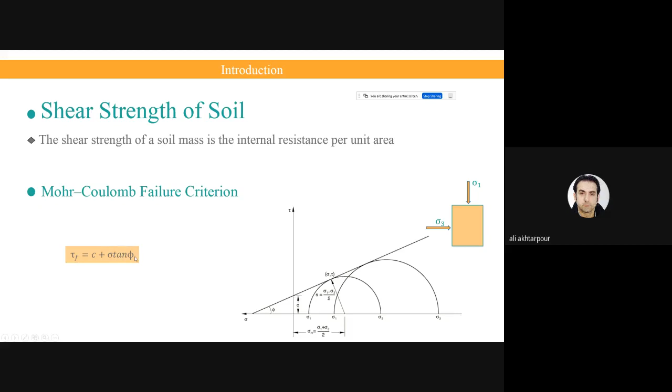Okay, it's just a review from soil mechanics, because you should know the basics of soil mechanics to understand the slope stability of the soil. We have two types of apparatus to measure these shear strength parameters. A simple type is the direct shear test. A direct shear test is a laboratory or field test used by geotechnical engineers to measure the shear strength properties of soils or rock materials.

The US and UK standards that define how the test should be performed are ASTM D3080 and AASHTO T236 respectively. The test is performed on 3 or 4 specimens from a relatively undisturbed soil sample. If you are going to evaluate the slope stability of a natural slope, you should take undisturbed specimens from the field.

But if you want to evaluate the slope stability of a man-made embankment, for example, an embankment dam or an embankment constructed for roadways and highways, or for the bridge, in this type of embankment you should compact the soil with the rollers. So you need to prepare the specimen in a manner that the density of the specimens will be equal to what you compact with the rollers.

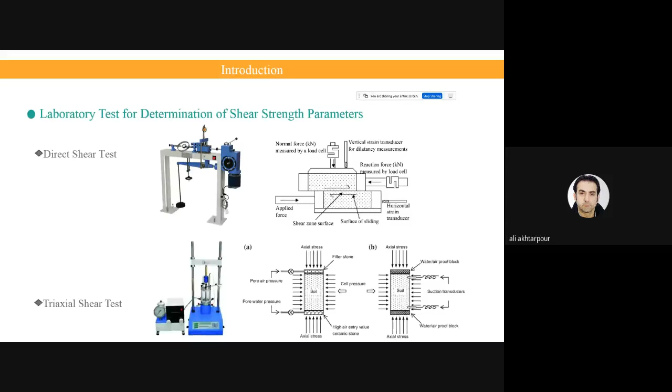For excavation in saturated clay soils, in short-term stability analysis, we should use only the undrained cohesion, and phi will be 0 for the short term. So it's very important to select the type of shear strength of the soil. Okay.

We have some programs and some methods to evaluate the stability of soils. Slope stability analysis is a static, analytical, or empirical method to evaluate the stability of earth and rock-fill dams, embankments, excavated slopes, and natural slopes in soil and rock.

Slope stability refers to the condition of inclined soil or rock slopes to withstand or undergo movement. The stability condition of slopes is a subject of study and research in soil mechanics, geotechnical engineering, and engineering geology. Analyses are generally aimed at understanding the cause of an occurred slope failure or the factors that can potentially trigger a slope movement resulting in a landslide.

The stability of a slope is essentially controlled by the ratio, please attention, the slope stability is controlled by the ratio between the available shear strength on a circle and the acting shear stress. Okay, the equilibrium between the available shear strength and acting shear stress can be expressed in terms of a safety factor. A slope can be globally stable

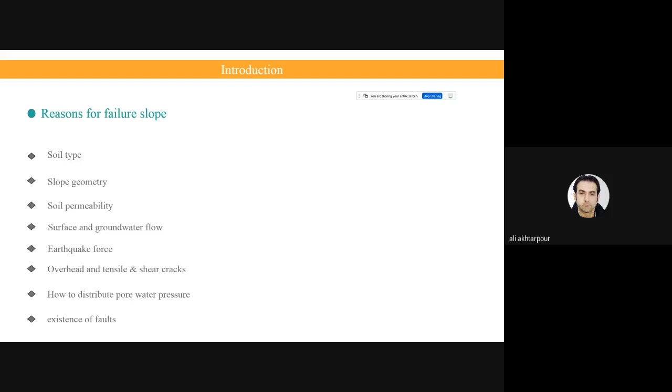To evaluate, we have some failure modes, the failure modes in limit equilibrium analysis. Let me give a brief explanation of limit equilibrium analysis. Most slope stability analysis computer programs are based on the limit equilibrium concept for 2 or 3-dimensional models. A stability analysis of 2-dimensional slope geometry using a simple analytical approach can provide important insights into the initial design and

We have different methods for evaluating the factor of safety. All methods are based on the comparison of forces, moments, or stresses resisting movement of the mass with those that can cause unstable motion. The output of the analysis is the factor of safety. Please pay attention: the output is the factor of safety for each assumed slip surface.

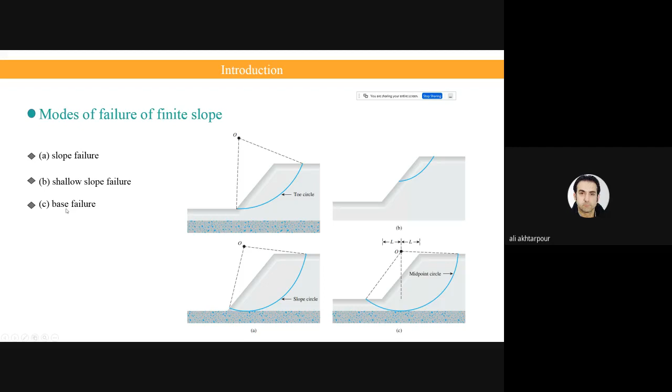Factor of safety, as I told you, is defined as the shear strength of the soil over the applied shear stress, or we can call it the mobilized average shear strength of the soil. Mobilized shear strength is equal to applied shear stress. Attention, applied shear stress is equal to mobilized shear strength in the soil mass. You can see here again the equation of Mohr-Coulomb.

The ordinary method of slices is more common for evaluating the factor of safety. For the slice method, we must first choose a shape for the sliding surface. Very usually we choose the circle type failure, but not in all conditions. In some conditions, maybe it differs from the circle. But in common slopes, the circular type is appropriate for evaluating the factor of safety.

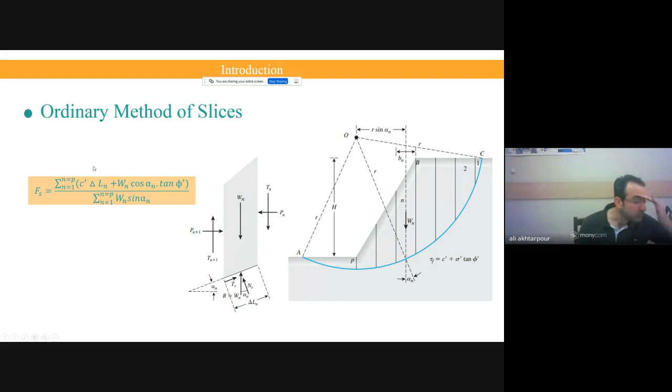Shear stress: if you divide T by the base slice area, you can have the shear stress on the base of a slice. The summation of the applied shear can be the total shear applied on this slice. But this method is not usually used because of the low accuracy of Fellenius.

Another assumption to evaluate this unknown force was suggested by Bishop's simplified method of slices. Because of the short time, I can't explain the theoretical basis of this equation, but the equation is somewhat different from Fellenius's equation. You can see here the effect of cohesion of the base slice, effect of friction, but here you can affect the influence of the pore water pressure. Here Un is the pore water pressure at the base of the slice.

Multiplied by this term. This term is a term which also contains the factor of safety. So you have an equation, the factor of safety is here, and also the factor of safety is contained in M alpha. So the software needs to have a trial and error procedure. It's very difficult to calculate by hand because the failure plane must be divided into many slices. For each slice, you should calculate the summation and do the trial and error procedure to finally calculate the factor of safety for that proposed sliding surface.

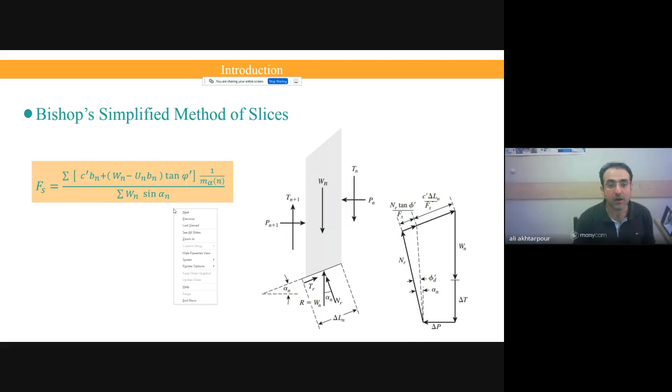But we don't know the exact location of the sliding surface. So as I explained, we need to have a large number of sliding surfaces and calculate this procedure. After that, the minimum factor of safety is the predominant factor of safety, and the related shear failure plane is the dominant mechanism for the sliding. So it's very difficult to calculate, hence we are going to introduce a software called GeoStudio for solving the problems.

As I told you, we are going to work with the 2018 release, and I have a version of this software, and I can send all the participants the full license of GeoStudio by Telegram. GeoStudio contains about 7 modules: SLOPE/W, SEEP/W, SIGMA/W, QUAKE/W, TEMP/W.

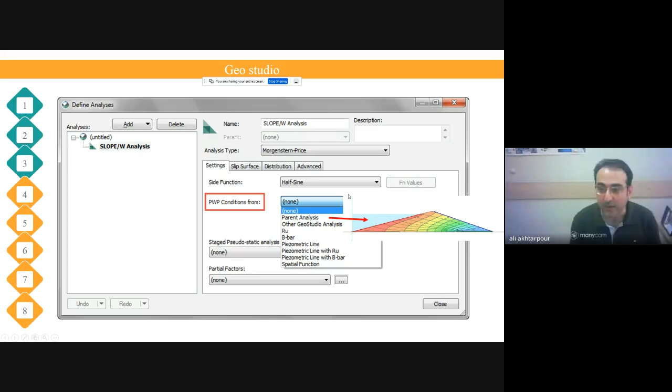If you use another GeoStudio program, for example SEEP/W, to perform a seepage analysis, like a seepage analysis in an embankment dam, then you can use the parent analysis type, introduce that file, and the program will extract the pore water pressure from the calculated seepage analysis into SLOPE/W. It's somewhat complex for you, so you need to work with a simpler PWP condition type.

Another type is Ru. Ru is defined as the pore pressure over gamma multiplied by H. Gamma H is the surcharge, and Ru is a ratio multiplied by gamma H for every point, and the program will calculate the pore water pressure. Another type is B-bar. It's really complex, it's not suitable for you.

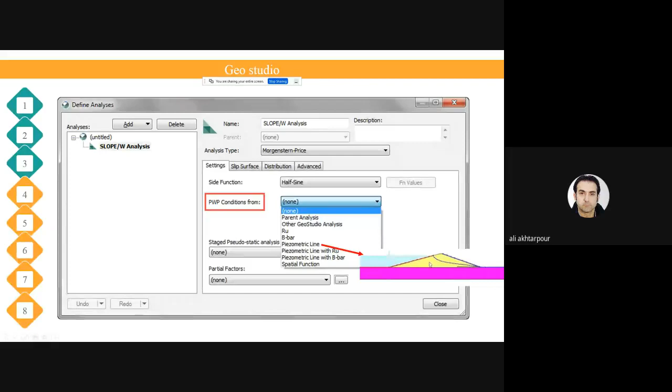The more suitable type for introducing the PWP condition for you is the piezometric line. When you evaluate slope stability, for example for this type of dam, you know the phreatic line is like this in the body of the dam. So you can draw the phreatic line, and the program will calculate the pore pressure from it, as I explain later.

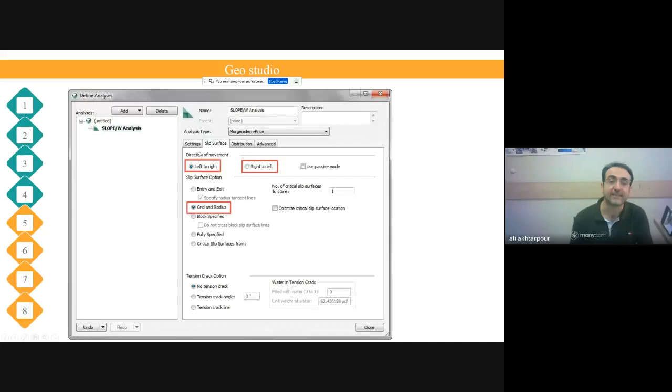Okay, slip surface type. After you choose the PWP condition, you must choose the slip surface. After the settings tab, you can see slip surface. You click on it, and you see two types: left to right and right to left. If the sliding surface begins from the left and continues to the right, you have to choose left to right.

But if the geometry is drawn on the right hand side, the slope will begin from the right into the left, so you must choose right to left. Okay, I just explained the more common expressions here. Some of them are not suitable for you; just the common and usually used parameters here.

Also, you can introduce the region and limitation of the slip surface by two types you need to know; the others are not important for you. One type is entry and exit. I will show you in some examples. You select a line limiting the start of the circle and a limitation for the end of the circular surface, so the program will go from each point in the upper part to each point of the lower part of the slope.

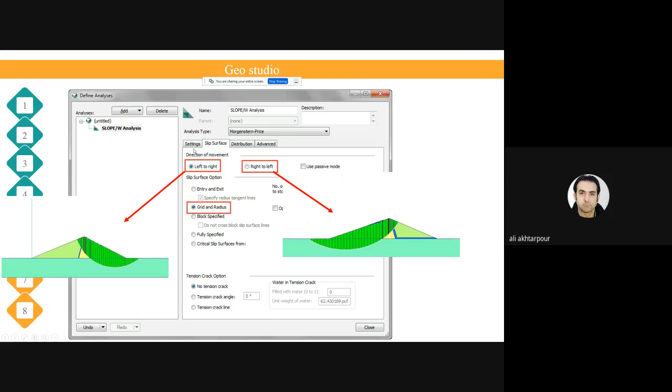Okay, here you can see left to right. It's an embankment dam: here for downstream, and for upstream of the dam you can see the right to left direction of movement. Here you can see the entry and exit: the entry region and the exit, and you can choose the number of divisions, and the program will draw the circle from each point of the entry to each point of the exit. This is just one of the circles.

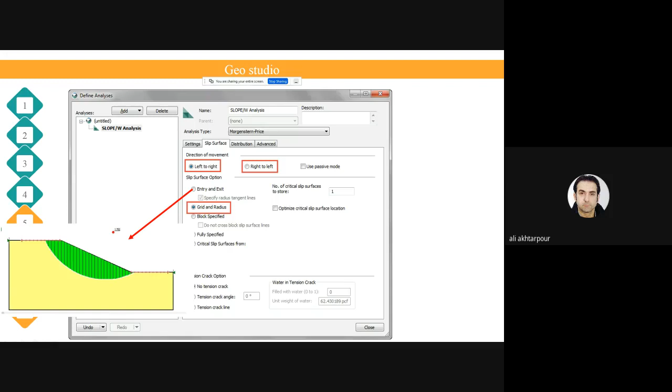We have many circles depending on the whole number of divisions, the number of points you choose for the entry and exit, from each point to each point. Maybe more than hundreds of circles can be calculated by the program in a short time because of the high performance of today's computers.

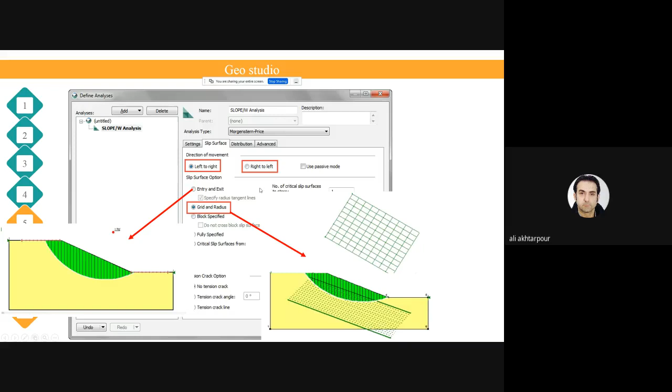Grid and radius is like this. Here you define the grid for the centers of circles, tangential to these lines. Circles are drawn from each grid point tangential to one of the lines, so we have a large number of circles in the defined regions. So you need to define the slip surface area; it's very important. You should choose the area that covers all possible failure surfaces.

Okay, in the second part we explain the units. Please pay attention: View, Units, and here you can choose the units, for example the unit for weight, for force, for time.

Usually in Iran we use metric units. Maybe in Iraq it is similar. Metric units are more common in our calculations: the kilonewton for the force, meters for the distance, the kilogram for the mass, and the second for the time.

In the second slide, you can see the model geometry. Here you can see a simple drawing, a simple geometry. First, we have to select the points, and we can select the points by two methods: select on the page, or input the coordinates here.

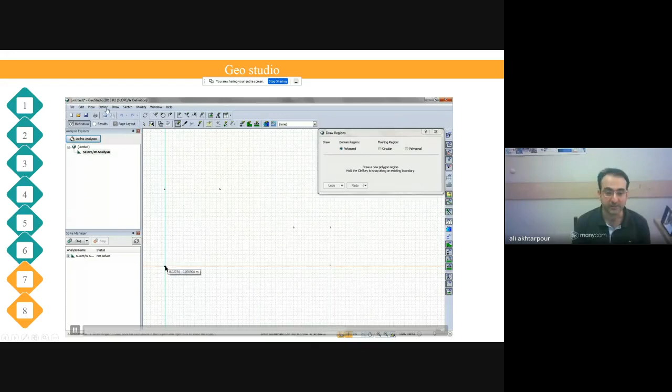I define 5 points. After that, we must select the regions. Please see again. Here you can define the points by clicking on the page, or define the points here by inputting the coordinates. After that, you must select from the Draw menu, Draw Regions.

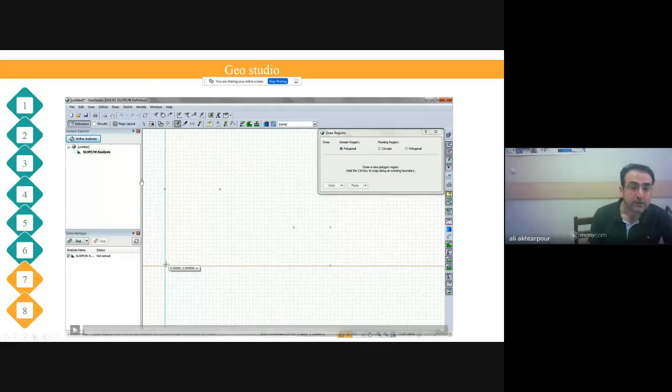Dr. Ali, excuse me. I think you have a problem in your presentation because there is no program page here, just the presentation, just the notes. I think you have to share your entire screen, to be able to share the program and the PPT at the same time. I have prepared a short video from GeoStudio. Now we are seeing just the presentation, doctor. Can you see the environment of the software? I see it now. Okay. It's a short video prepared before. Thank you. I will continue.

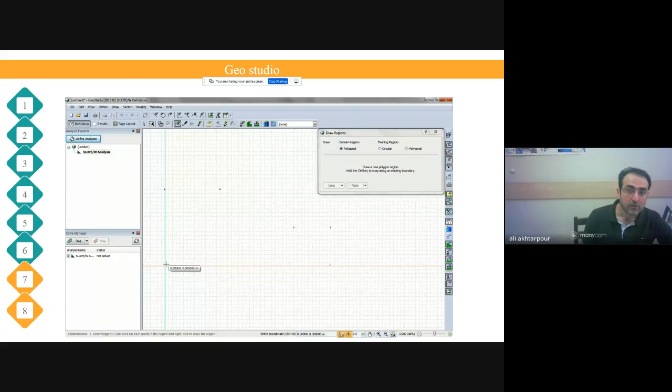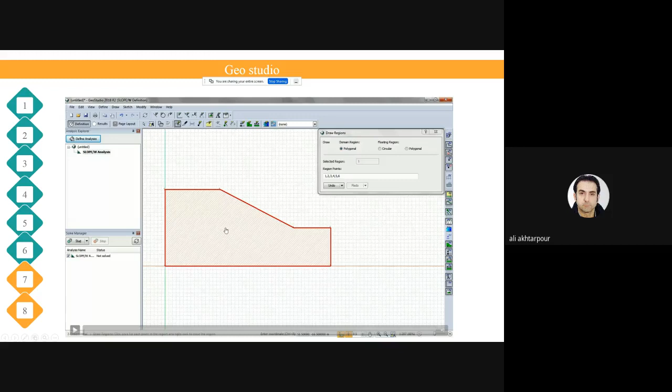After that, you must choose Define here and Draw Regions, and connect the points. After the final connection, a polygon will be formed and a hatch can be seen in the polygon. Here you can see the number of points: from 1 to 2 to 3 to 4 to 5 to 6, and a closed polygon is formed.

After that, we must introduce the material properties. For example, we have a soil with gamma equal to 18, cohesion equal to 10, phi equal to 30, and for defining the water pressure, we use the Ru method, the pore pressure ratio method, equal to 0.27. Here you can see the Define Materials menu.

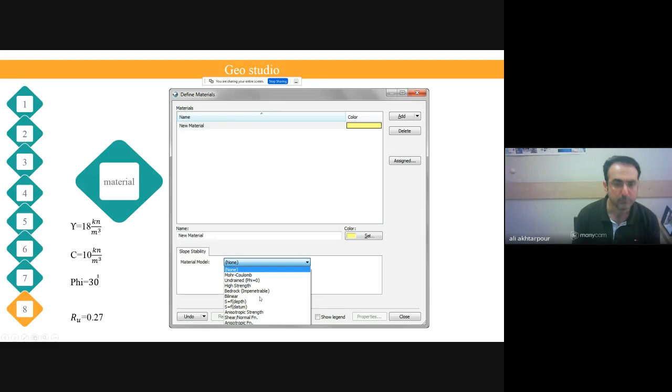Here you click on Add. I can't click here because it's a video, but you can see the video in the next slide. Add, select a name for the material, and click on the tab here. You can see some different shear strength model types for the soil. The more common type is Mohr-Coulomb, so you use the Mohr-Coulomb failure criterion. Here you define the failure criterion for that material.

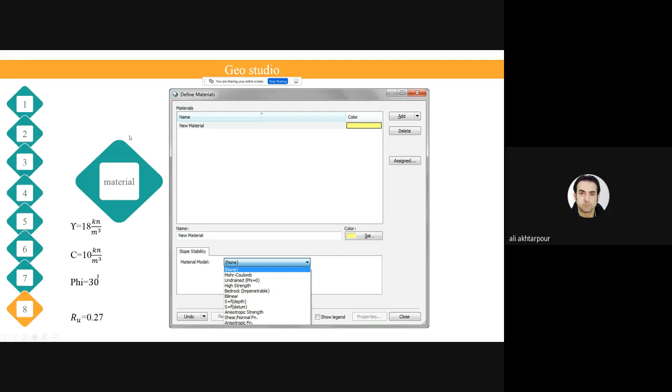If you have many materials, for example 5 materials, you should press Add and define 5 materials here. Each material must be a different region in the geometry input. Next, you can see a larger, clearer picture. Here you can see a video.

Please pay attention. Define Materials, add new material, give it a name, for example, soil 1, material model Mohr-Coulomb. Then you can see unit weight 18, cohesion 10, and phi equal to 30. This tab is suction. Suction is not used, and the advanced tab is not needed for you.

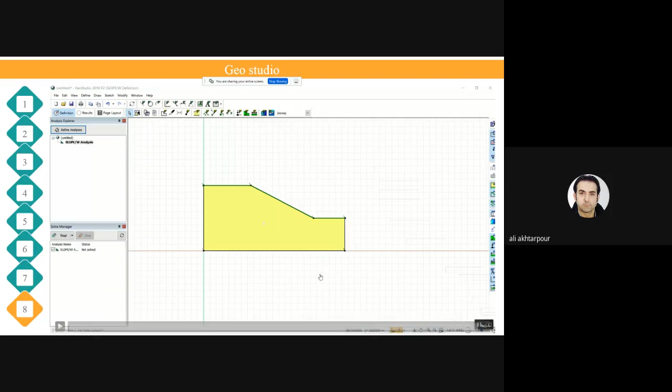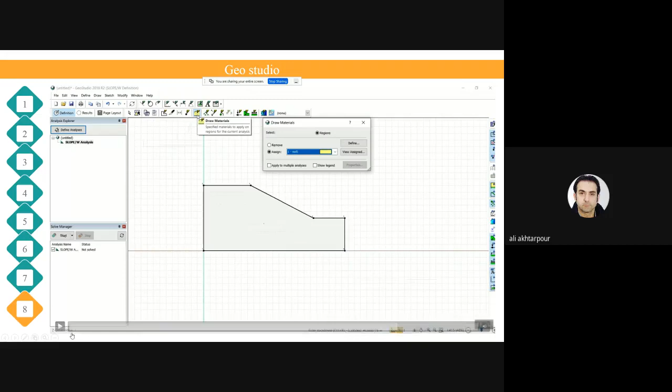After that, you Draw Materials. Here you can see the materials. Choose Assign and click on the region. I repeat it for better understanding. Draw Materials from this icon, select soil 1, then Assign and click on this region.

Soil 1 is considered for region number 1. In this simple model we just have one region, number 1. You may have different regions with different soil types and soil parameters. In the next slide, you can define the pore pressure ratio here.

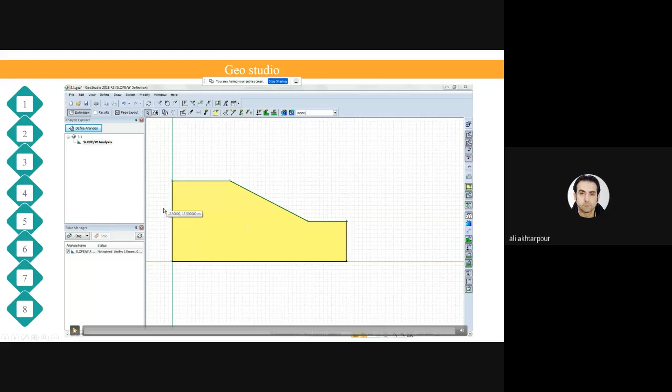Here, define pore water pressure tab. After that, choose soil 1, and the RU coefficient is defined here. As I told you, it is the coefficient of pore water pressure to the gamma multiplied by H in the RU method.

RU method, please attention. The RU method is only defined for fine soils where a consolidation phenomenon can occur, when undrained behavior can occur, and when development in the pore pressure in the soil can occur. Just for saturated fine soils such as clays and silts. It can be used in embankment dams: just for the clay core, we use the RU method to define the pore pressure conditions.

Okay, please see again. Define pore water pressure. Select soil 1, input the RU coefficient, and then close. Next one,

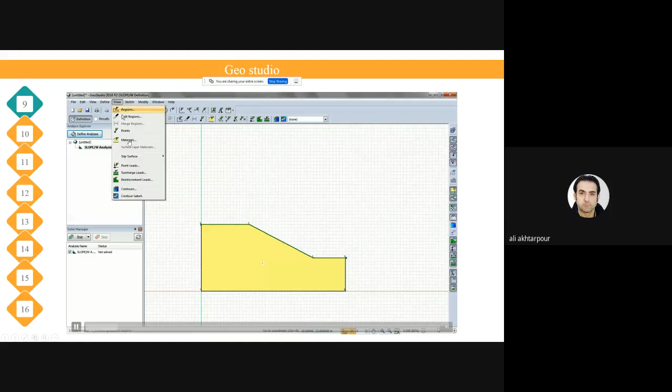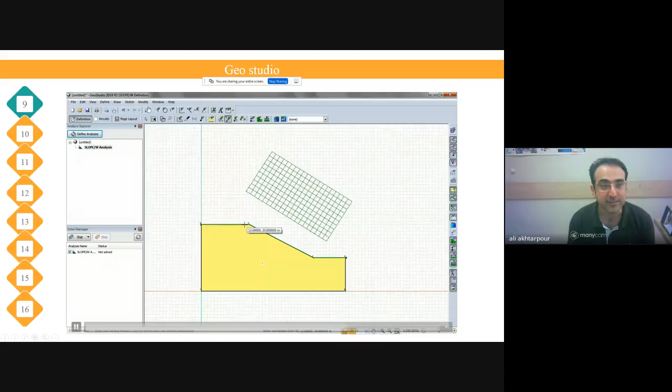draw a slip surface. As I introduced to you before, in this model we use the slip surface entry and exit type. After that, you can set the grid number of increments, for example, 20, and in the y direction, 10. Divide into 20 by 10 centers for circles. After that, draw the tangential lines, okay? And the radius increments, 10, divided into 10 lines.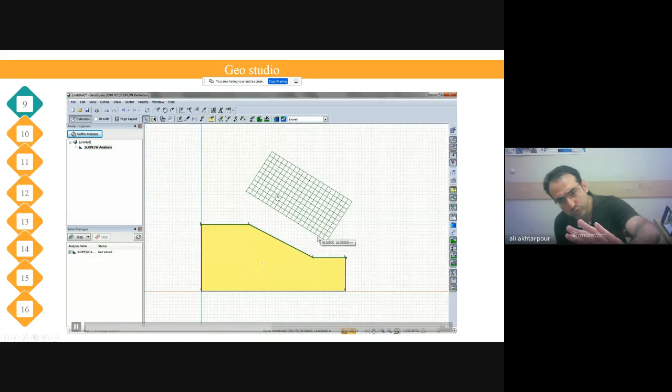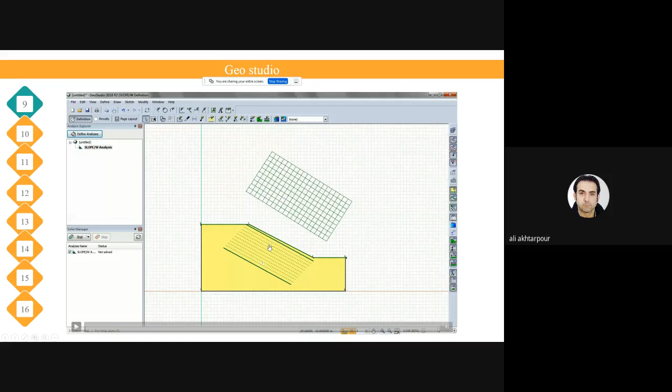Again, please see. Draw a slip surface, grid, define the grid region here, like this. Number of increments, 20, for example, by 10. You should use a large number, for example, 10, 20. This type. After that, slip surface radius. Here you should define this area and the number of radius increments, 10. The program will draw circles from each of the grid points to each of the tangential lines.

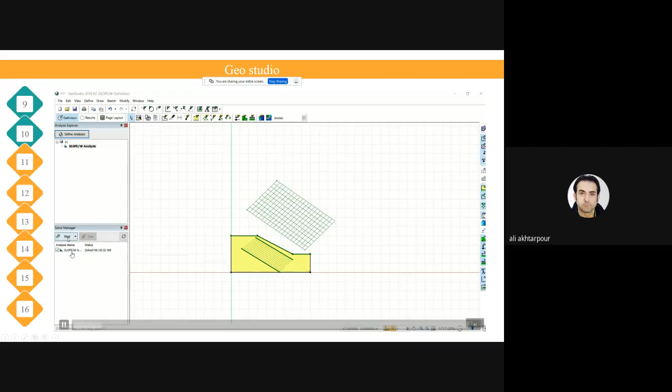In the next step, analysis. So the definition is finished for a simple geometry. Now, in the next step, we should click on start from here. Okay, start here, start. You can see here, start. The program in a very short time calculates the factor of safety for hundreds of circles.

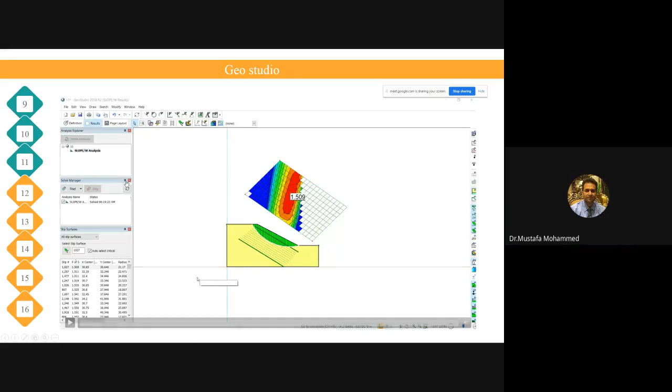Yes, you are presenting now, doctor. Go ahead. Could you see? Yes, it's clear. But don't forget, you have to present your entire screen. Yes. Okay. We see it. Thank you.

Here you can see the result, as I explained before, for each circle and also for all circles simultaneously. Okay, all circles. And the red circles are the critical ones. The most critical is shown previously. You can change the font size here and see the factor of safety between two numbers for each color. Each color is related to some factor of safety, okay?

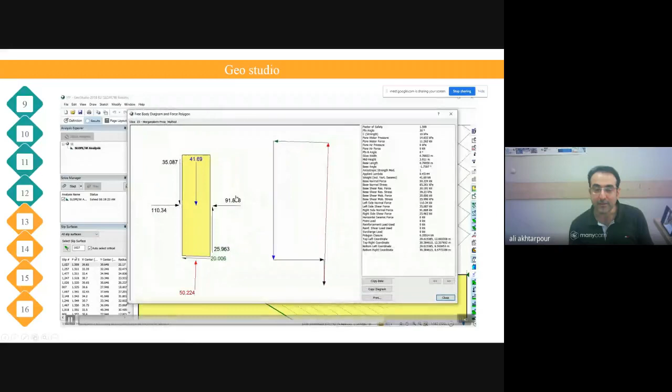Next, in the next slide, we can just explain briefly the slice calculation, okay? You can see here from this icon, the slice, okay? Or here, choose a slice, and you can choose any of these slices and see the free body diagram. By choosing any slice, you can see the free body diagram, the interslice force, also the weight, and also the reaction force, as I explained in the basics of the methods. So here you can see all the slice forces.

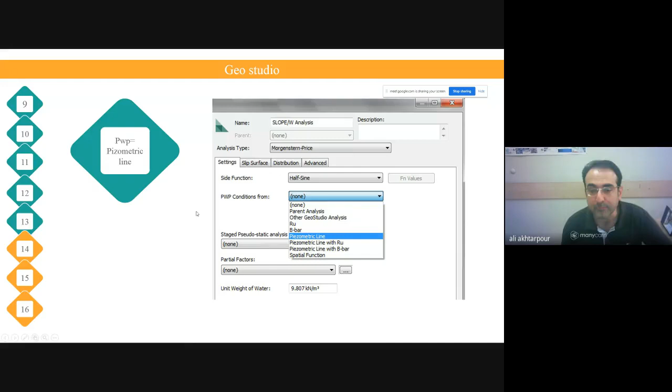Next, introducing the pore water pressure by piezometric line is usually more common for you. As I explained before, in the first window, you have to choose piezometric line instead of RU. After choosing the piezometric line, follow the modeling and the material properties like the former example, and you reach the stage where you should define the pore water. Again, we define the pore water and piezometric line.

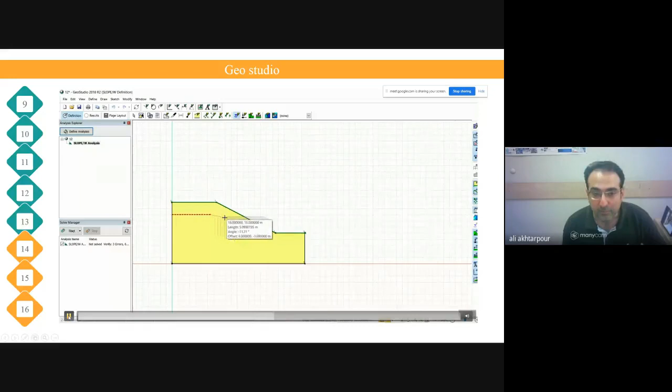You can here draw the phreatic line into the soil. Okay? Let's see again. Here, draw pore water pressure, select the type, apply piezometric line, draw the piezometric line here. Okay, done. And the program will apply the pore pressure for each point below the phreatic line.

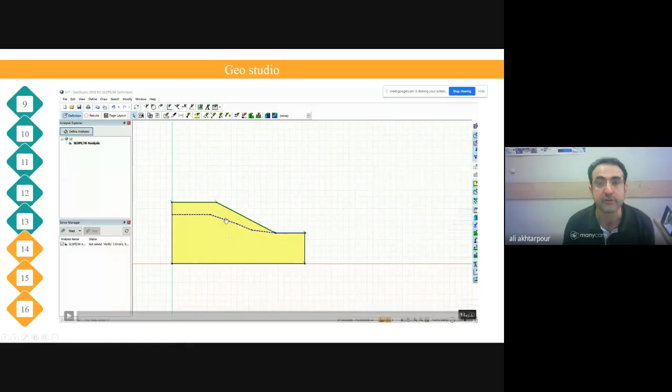Attention, please. For the upper part of the phreatic line, the pore pressure can be considered as 0 or negative. It's based on the unsaturated soil theory, which is not suitable for you. You assume that it's 0, that above the phreatic line there is no pore pressure. But in reality, the pore pressure is negative. For the points below the phreatic line, the pore pressure is calculated from the distance of each point to the phreatic line, as you can see in the next slide, the calculation analysis.

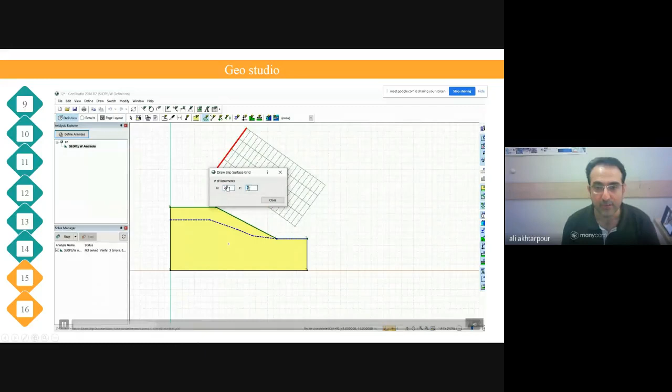Again, we choose start. Here, grid, define the grid regions, like the former example, 20, 10. After that, draw a slip surface, radius, define the limitation for tangential, number of radius increments 10, divide into 10 lines, then start calculating. As we can see, very rapid calculation, and finally increase the font size, and you can see here the factor of safety is less.

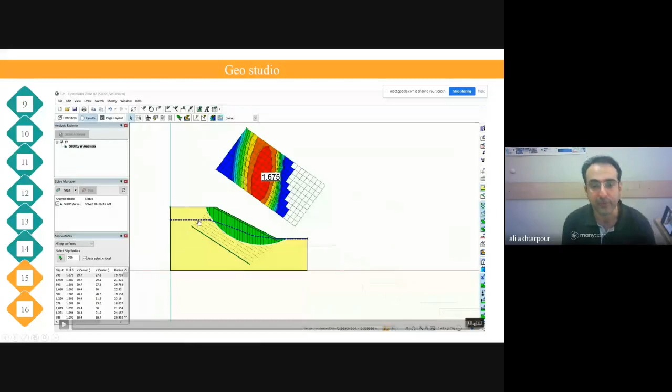It can be compared with the previous model. In the previous model, we used RU, but here, instead of the RU pore pressure ratio, we define a phreatic surface, and the computer calculates the factor of safety based on the defined phreatic surface line.

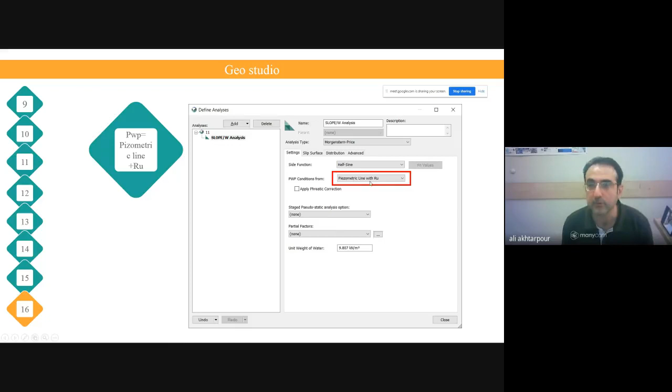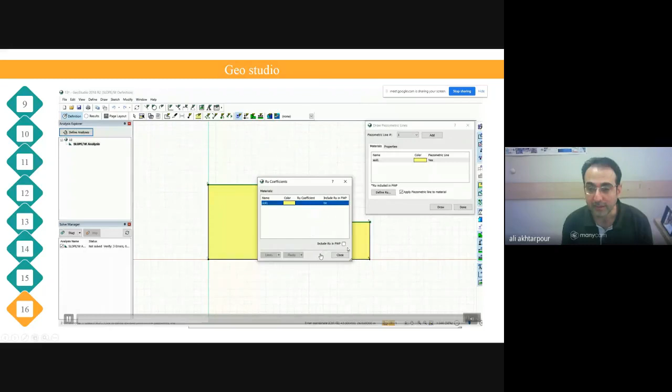You can also use both the piezometric line with RU. You can select PWP conditions from piezometric line with RU, together. Here you can see again: pore water pressure, add piezometric line, select the soil type, define RU, and include RU in PWP. It means the program calculates the pore water pressure from both RU and the piezometric line, adds them, and finally calculates the pore pressure for each point from the distance to the phreatic line, and also by means of RU.

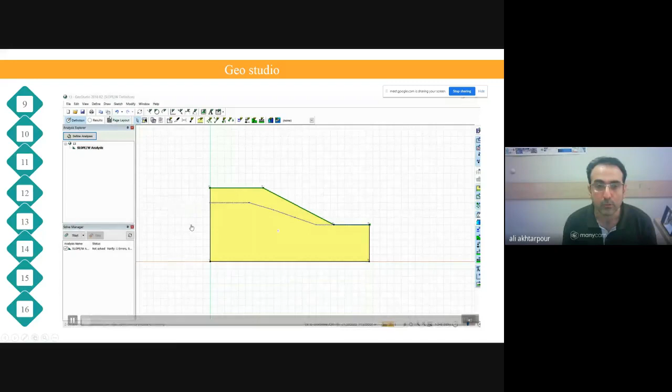In the next slide, analyze the model. You will see the reduction in the safety factor, because in this model both RU and piezometric line are introduced, and the pore pressure for the points is greater than the previous model, so the factor of safety will be lower. Here, start. Solve, and after increasing the font, you can see a serious reduction in the factor of safety here.

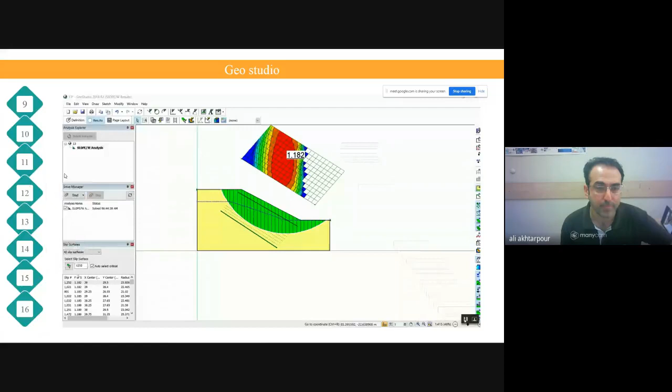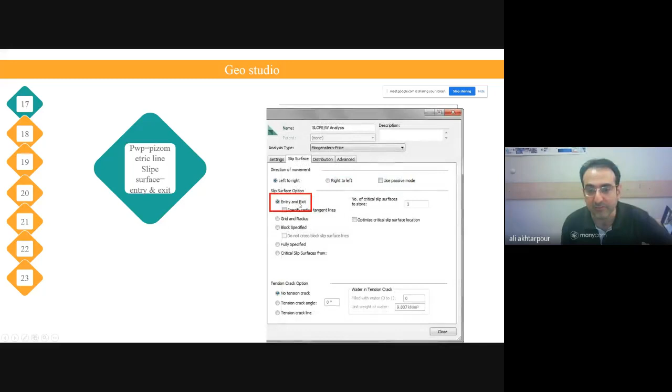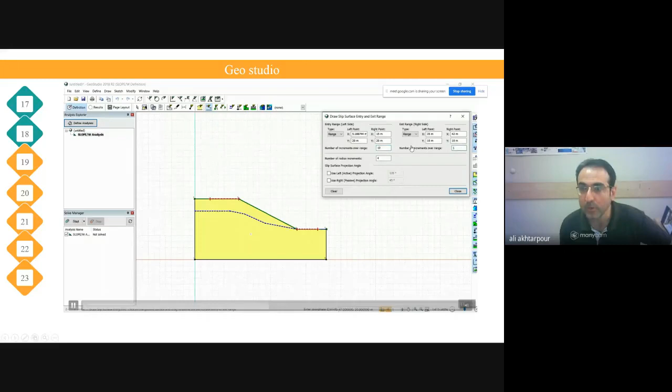Next, if you want to use a piezometric line with entry and exit surface, which I explained before: in the analyze tool, choose draw slip surface, entry and exit. Here, click on the left point and draw the region, and divide the region by 8, the number of increments over range. And draw the range at the bottom of the slope. You can divide each range into, for example, 10, and after selecting start, you can save this file with another name.

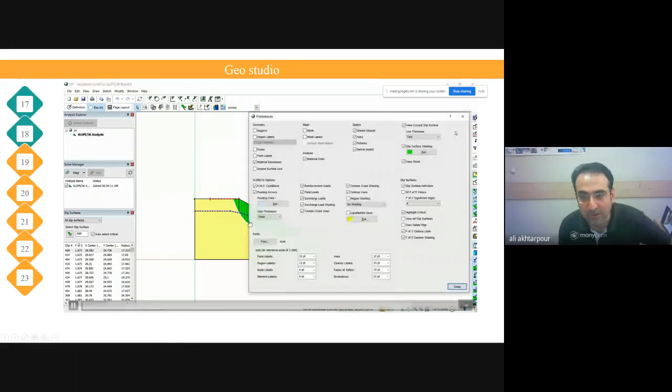Here you can see from each point to each point, with a larger font size. If you choose the correct range for the entry and exit, and the correct range for the grid and radius type, the final factor of safety will be equal, completely equal.

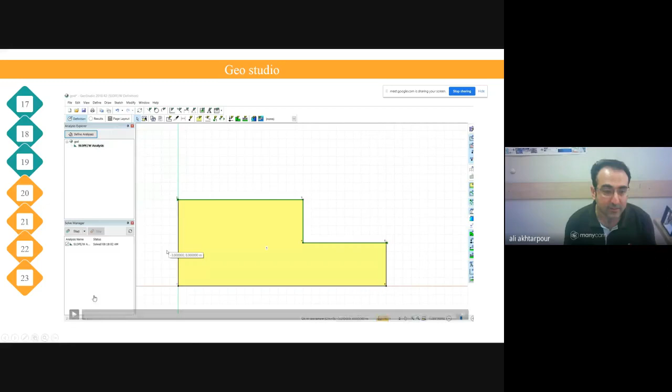So in the next slide, we can see, just because we are short and time has passed, we introduce to you a rapid explanation of slope stability. You can choose here a build geometry, a rapid explanation, build geometry for a vertical cut. In urban areas, we have more vertical cuts for excavating the buildings.

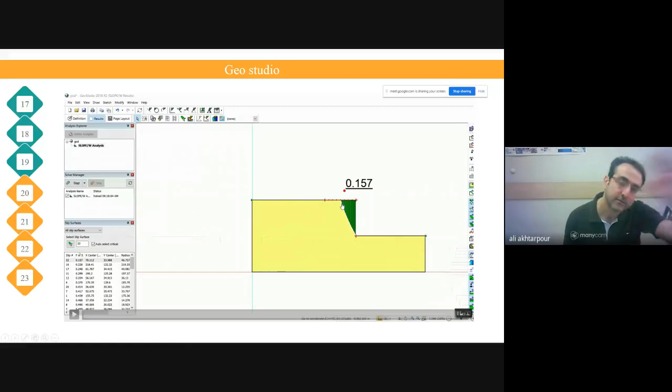We use entry and exit. For exit, we just set a point, not a region, because I am going to have the factor of safety for the circles that pass through the top. Here you can see a factor of safety for a vertical cut, okay? Vertical cut in that soil. The soil parameters were similar to the previous example.

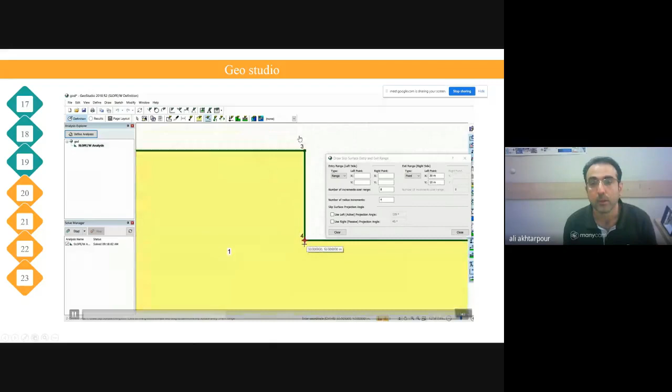It's not a stable cut because the factor of safety is much less than unity, and this cut is not stable. Again, draw a slip surface, entry and exit. The range of exit is just a point. For entry, click here, define the range, and divide it into some parts, start to calculate, and finally, the minimum factor of safety and the critical surface for that.

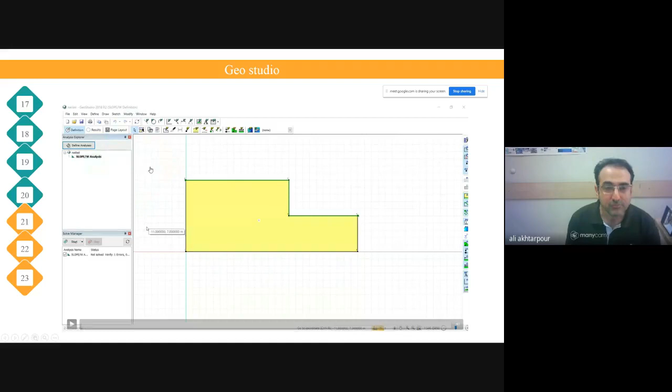So we want to stabilize this soil. It's not stable. We have two choices: reinforcement with soil nails and reinforcement with soil anchors. Nails are steel bars that can be placed into the soils to increase the factor of safety. It's very common in urban areas to stabilize vertical cuts. Okay, nail. You must define the nail in the soil.

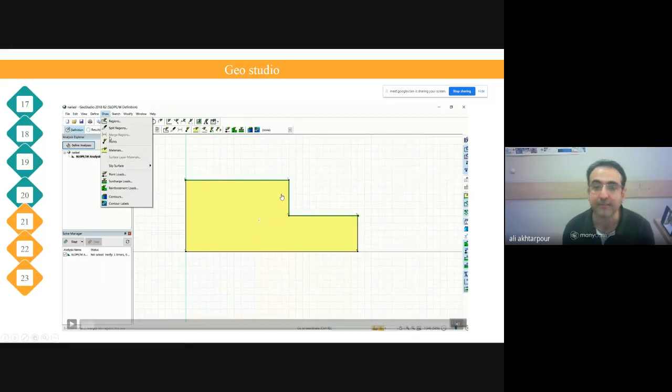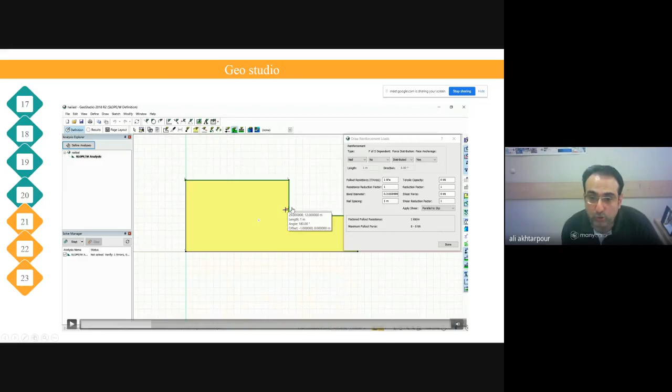The construction procedure is to cut each stage and install the nails. After that, the next stage, and install the next row of nails until the bottom of the slope surface. Here you can see reinforcement load. Okay, the type is nail. After that, I should explain here. You should choose a point for the start of the nail, the start of the nail into the soil.

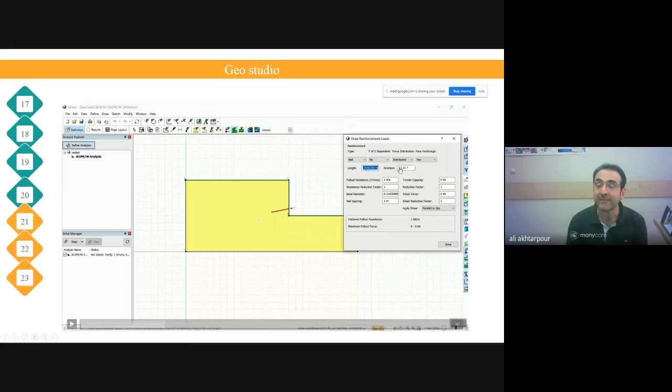Sorry, let me draw. Okay, reinforcement load. This window appears. Select the nail type, then a start point to the end point. Here, you just need to approximately draw the nail. After that, here you can introduce the exact length and exact direction of the nail. You can see here, exact is 8 meters with the direction of 20 angle.

Okay. Nail. Here. So the nail is drawn. Here you can introduce some factors of the nail. I just introduced the titles of them. You should work on them, and you should see a textbook to determine, for a specific soil and nail, what is the exact amount of these parameters.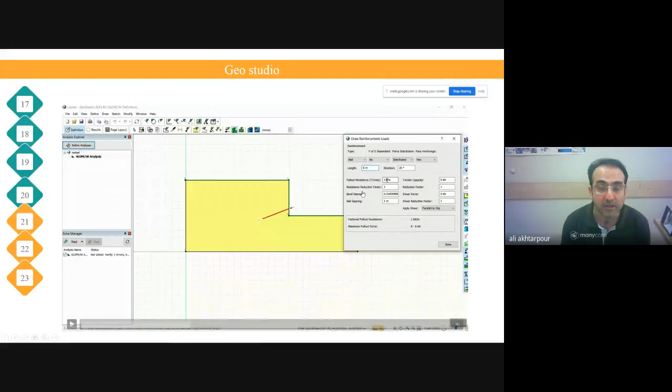One of them is pull-out resistance. The pull-out resistance means the strength of the bond between the nail and the soil, force per area. After that, the resistance reduction factor is the factor of safety for resistance. After that, you can see the bond diameter. Bond diameter is the diameter of drilling for installing the nail.

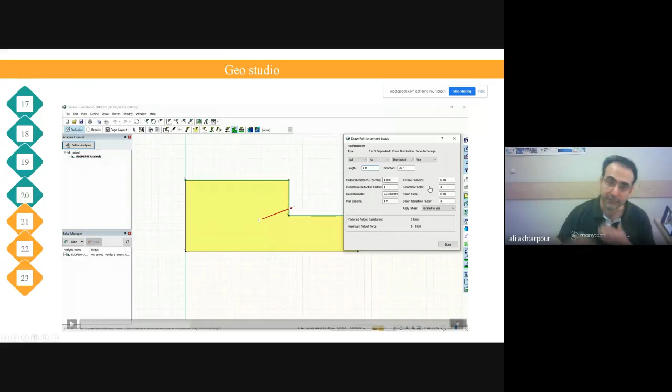After that, you can see the nail spacing, the space between the nails perpendicular to the slope. For example, you install the nails each 2 meters; nail spacing will be 2. Tensile capacity is the capacity of steel bars, and reduction factor is a safety factor for tensile capacity, and shear force and shear reduction factor. If you want to include the shear strength of the nail in the calculation, you can use it.

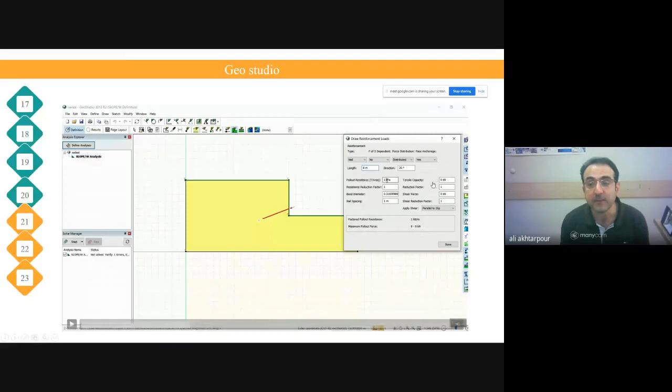But for bar nails, the bar has a small area, so the shear force is negligible, and you can set it to 0. So here we have to use the pull-out resistance, bond diameter, nail spacing, and the tensile capacity of the nails. For each row of nails, for example, we use here 100 kilopascal with a resistance factor of 1.5, nail spacing equal to 2 meters, tensile capacity 350 kilonewton, reduction factor 1, and draw another row of nails like previous, length, direction.

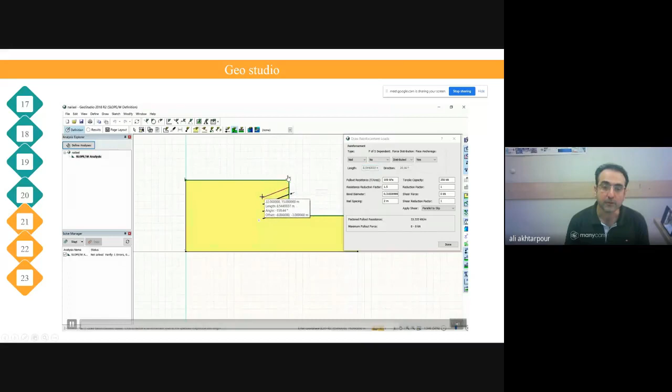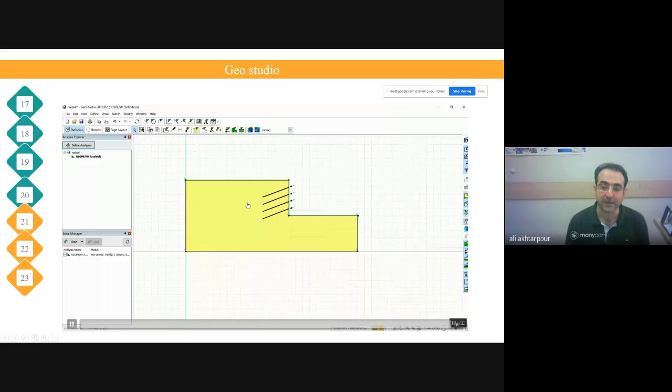Okay, there's another row, length, direction. It's a large cut, so we define 4 rows of nails here. After that the program will calculate for us. Please see here, nails, draw a slip surface, entry and exit. We choose the entry range for the sliding surface, like before, here and here. The number of increments over the range is 10, divided into 10 points.

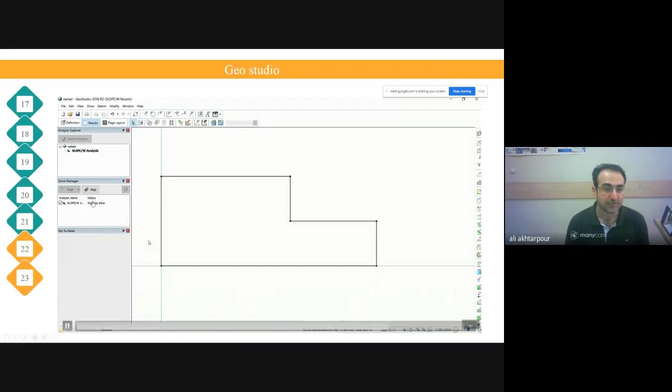Okay, start to calculate. Starting solve. You can see here a stable cut. The safety factor is more than unity, so the cut is stable, and the program can calculate the effect of the nails on the stability of the surface and calculate the safety factor for you.

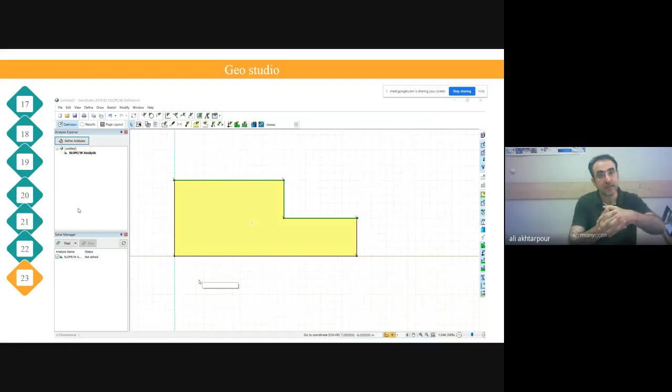The final part of our presentation is reinforcement with anchors. There is a difference between anchors and nails. Nails are just installed into the soil, but anchors are first installed, then injected at the end part of the anchor with cement mortar. After curing, after the mortar gets its strength, we can post-tension the anchors. We can have a pre-tensioned anchor and fix the anchor head with a typical wedge. This is a pre-stressed reinforcement to stabilize the soils.

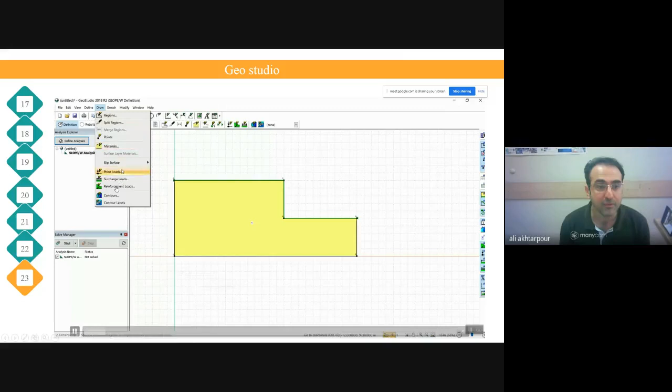It's used for deep excavations, deeper excavations. It's a very good method to stabilize the soils and also to control the deformations. You can see here the reinforcement by means of reinforcement load, by means of anchor. Here see anchors.

There is something completely like nails, but there is a difference, you can see here. First, we should draw the geometry of the anchors with a length of 8 and an angle of 20. Pull-out resistance, resistance reduction factor, bond length. It's different here. When you choose the bond length, here you can see a red line. It's a bond. It's an area.

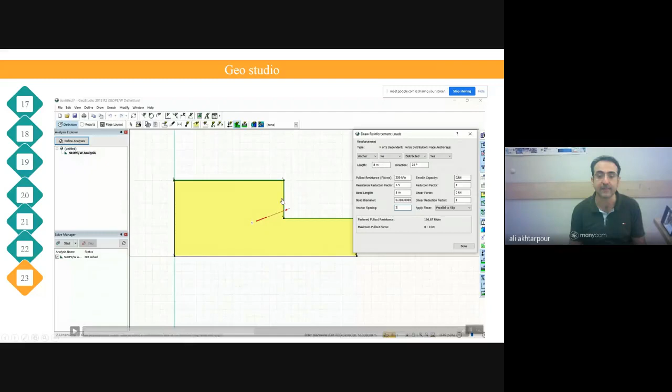It's the range of the anchor that's covered by the cement mortar and fixed into the soil. It's called the bond length. Bond length is calculated from the end of the anchor. When you choose 3, the program selects 3 meters as the bond in the anchor, and 5 meters, the total length is 8. The 5 meters will remain without any bond, without any contact to the soil, and anchor spacing is completely large.

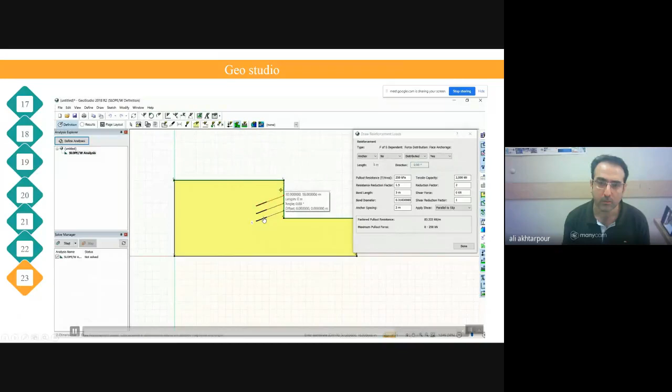Tensile capacity of anchors is usually greater than the bars, because the anchors consist of steel cables. The steel cables, you can pull them with high pre-stress. Tensile capacity, shear force, reduction factor 2, drawing the next row, again, length 8, direction 20 angle, completely like the former row, okay? Again, length and direction, done, defined. All things are defined.

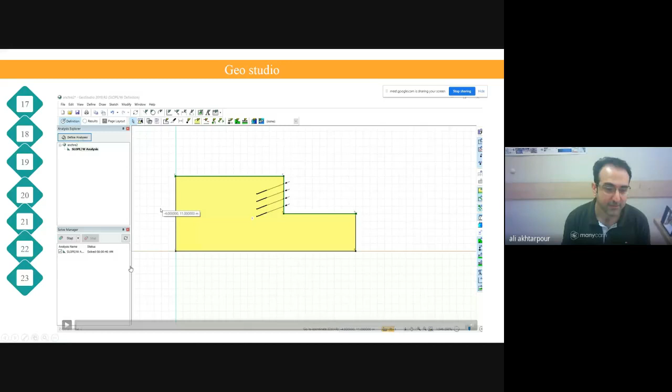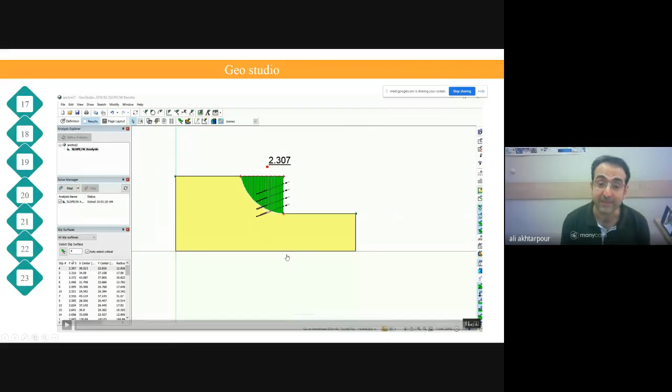So here in the next slide, and I think this is near the final slide, results for anchor. Here draw the slip surface, entry and exit. Again, define type, select points, just a point for exit, type range for entry, and divide the range into 10 points. The slices will be drawn from each point to the exit point, then start, and the program will calculate. You can see here a larger safety factor because the anchors have more influence on the safety factor of the soil.